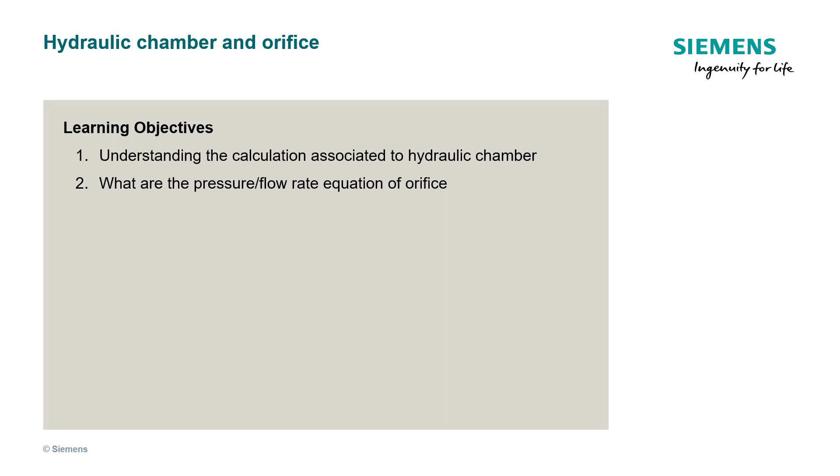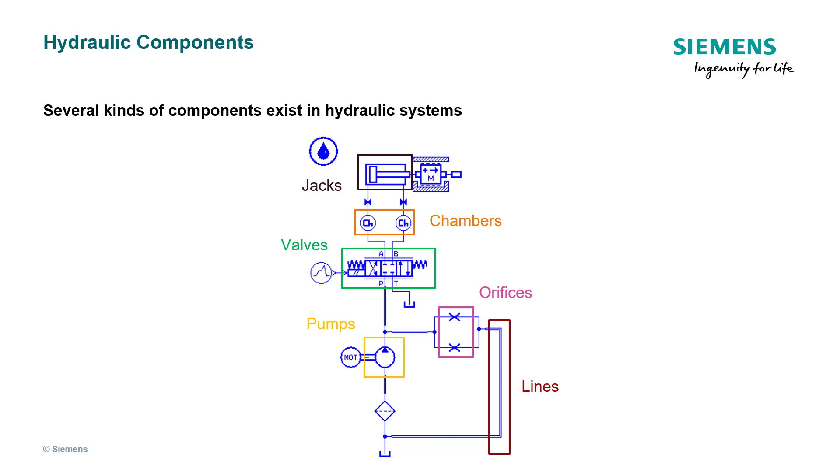Let's start with a typical hydraulic system where a pump acts on a hydraulic jack through a directional valve. This system regroups classical components found in hydraulic systems: pumps, lines, orifices, chambers, valves, and hydraulic jacks.

Hydraulic chambers are capacitive elements. They can be found in classical chambers, but also in accumulators or lines. The hydraulic chamber can have constant volume as well as variable volume. The inputs of the chamber are flow rates entering inside the volume, and the output is the pressure inside the volume.

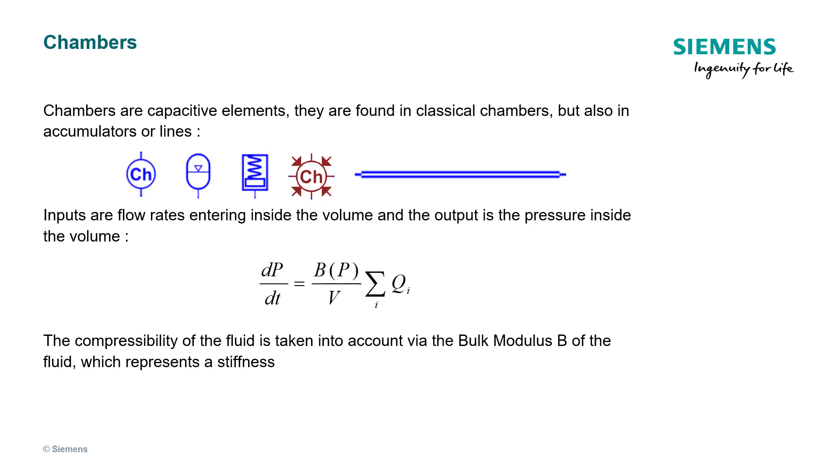The general equation behind a hydraulic chamber with fixed volume is shown below. B is the bulk modulus, which represents hydraulic stiffness. For a variable volume chamber, you can check the help document for equations.

There are two kinds of losses in hydraulic components. One is singular losses, or local losses, which happen at restrictions, orifices, expansion, or contraction due to disturbances. The other one is regular losses due to viscosity effect, and regular losses occur in pipes.

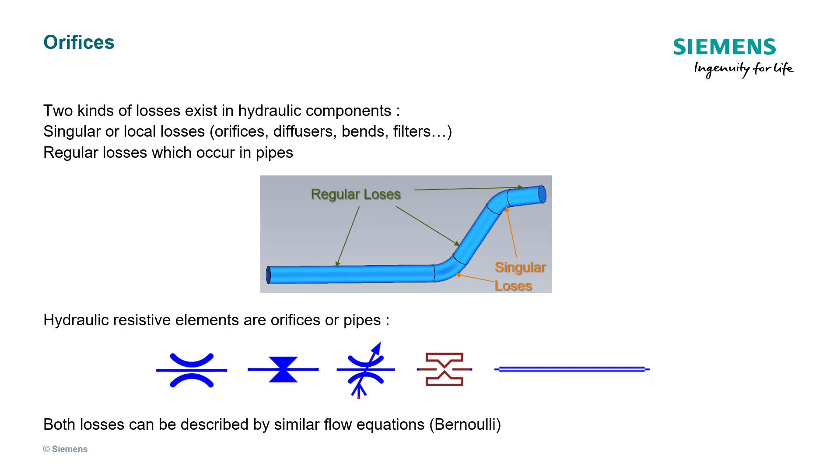Now we'll introduce how the equations of the orifice are derived. From Bernoulli's equation, under the assumption that there is no energy loss when fluid passes the orifice at the restriction in the middle, as shown in the figure, the total pressure will recover if the flow areas, heights, and static pressures are the same at both upstream and downstream positions.

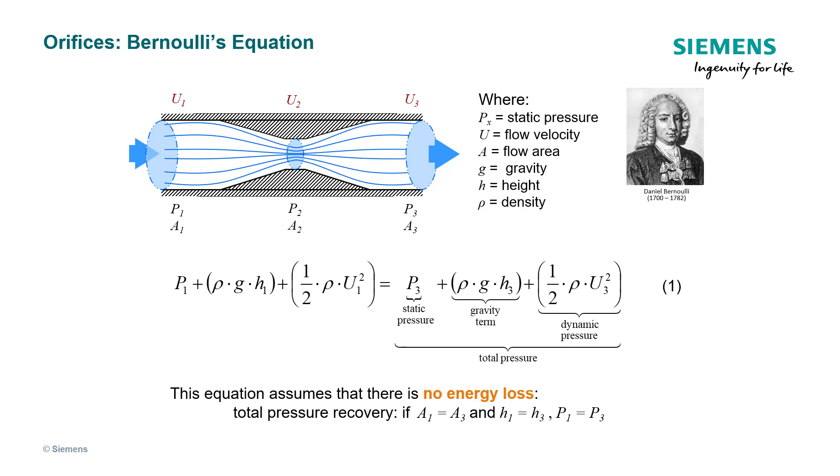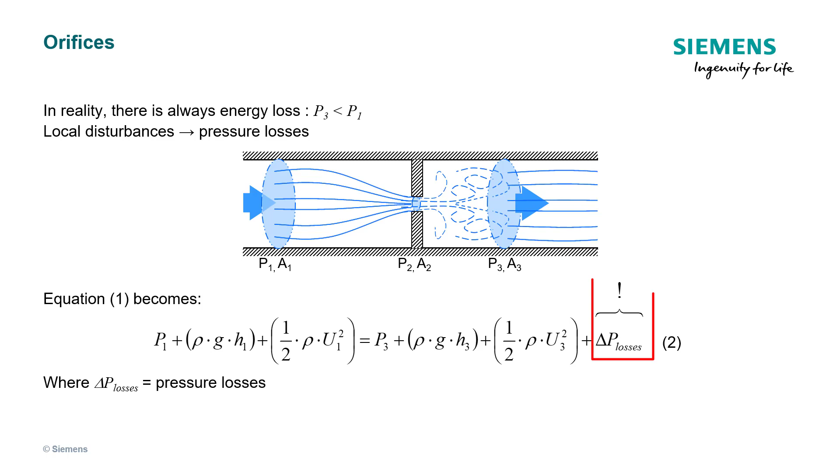But there will always be energy loss, and what one can observe is P3 is less than P1, because when fluid passes through the orifice, local disturbances happen, and it causes energy losses in this region. So Bernoulli's equation will need to add a pressure loss term on the right-hand side. As introduced in previous slides, there are two types of pressure losses.

For the regular losses in a hydraulic network, the pressure losses are expressed as a function of the fluid velocity u, density, and the friction factor xi, as shown in equation 3. This equation is mainly used in components from the HR library.

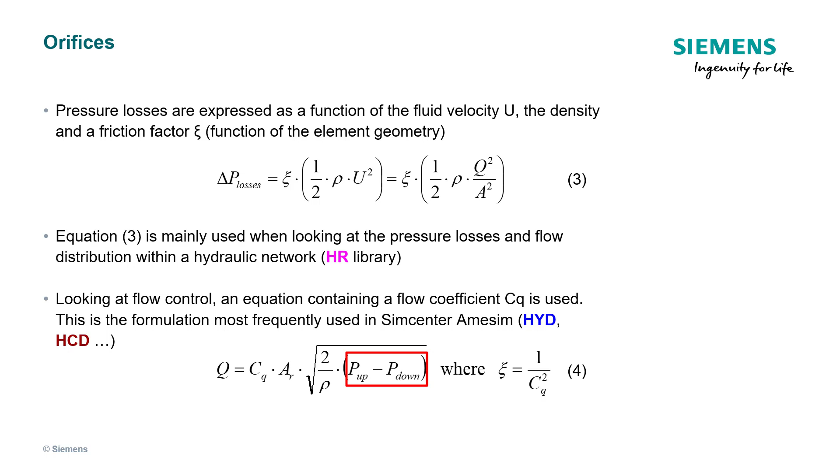In flow control components, another equation, shown at bottom, contains a flow coefficient CQ, and is the most frequently used equation in both the hydraulic library and the hydraulic component and design library. AR is the cross-sectional area of the orifice, ρ is density, and P up minus P down is delta P across the orifice. We're familiar with these terms, but what is CQ?

There are two types of flow regimes defined in fluid mechanics, depending on whether inertia or viscous effects dominate. It's a laminar flow when the flow pattern is smooth. In this situation, the viscous force inside the fluid is strong enough to limit the fluid particles to flowing only along one direction. When the fluid is turbulent, the fluid motion is random and has turbulences. Due to strong inertia force, the fluid cannot be constrained in one flowing direction anymore.

The two flow conditions are related to the Reynolds number, Re, which is dependent on flow mean velocity u, hydraulic diameter of the orifice, and viscosity, and the transition between these two regimes is done through the expression of the flow coefficient Cq.

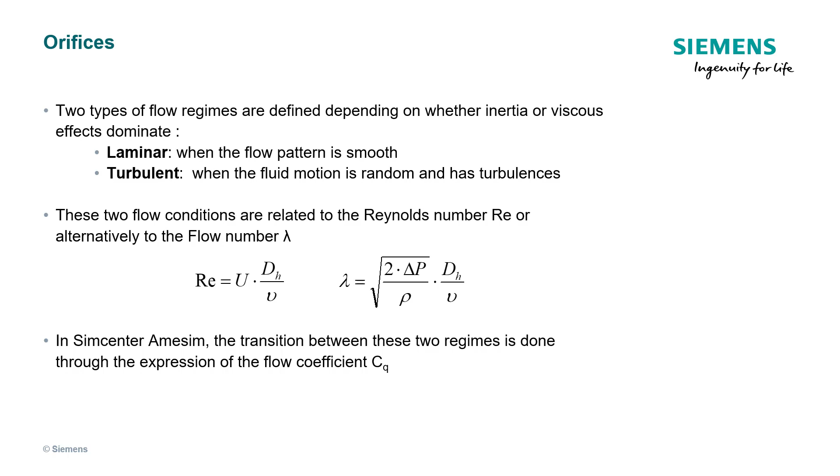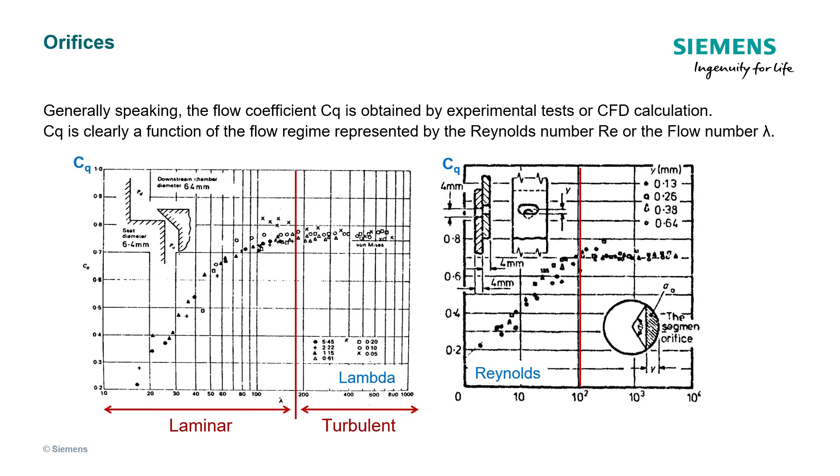The flow coefficient Cq is obtained by experimental tests or CFD calculation. As shown in the figure below, there is a critical Reynolds number. When it is lower than this critical value, the shape of Cq is almost linear and the flow regime is laminar. When it is higher than the critical value, Cq is at its maximum constant value and the flow regime is turbulent.

Now, as a summary of flow rate calculation in the orifice, we have the following equations. These are the most important equations for the orifice, especially the last one. Please do memorize these equations. They will be helpful when you are going to tune your own hydraulic system model.

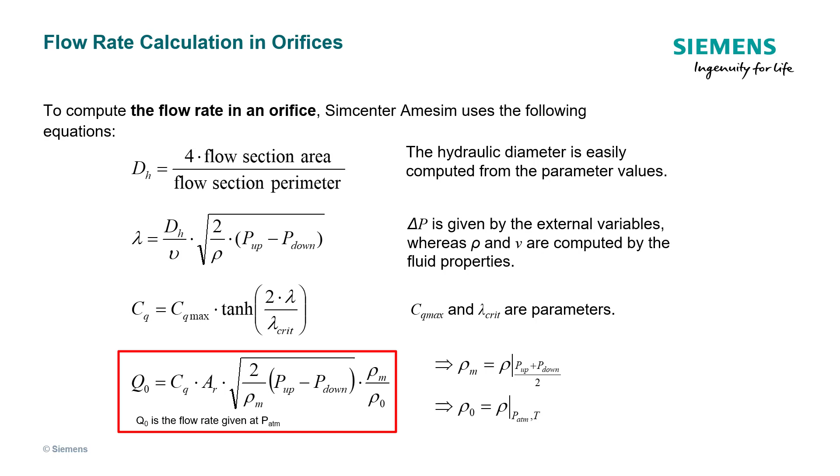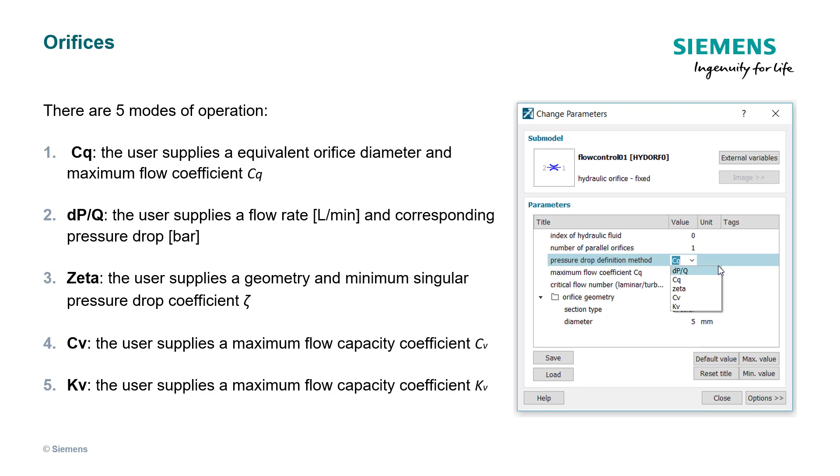Please also notice, except for the conventional use of CQ for pressure drop and flow rate calculation, there are also 4 other options in the orifice component. For a more detailed description of these methods, please refer to the help document.

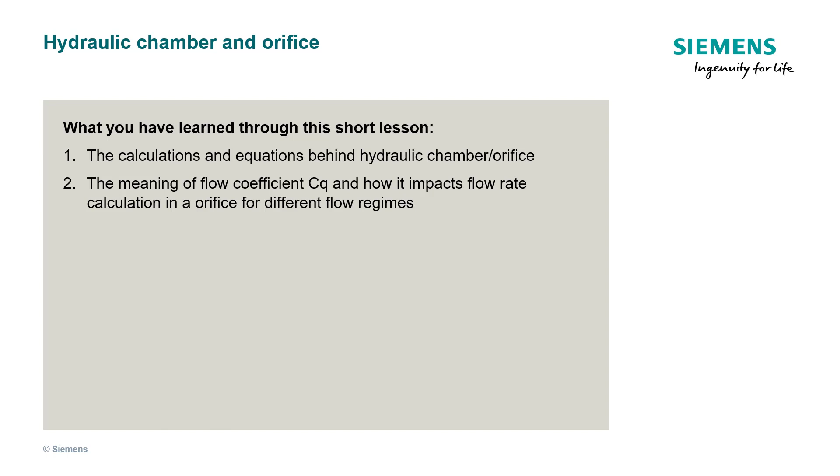In this lesson, you have learned the calculations behind a hydraulic chamber and an orifice. Moreover, you must know the meaning of the flow coefficient CQ, which can determine the flow regime, and the flow rate calculation in an orifice for different regimes. That's all for this short lesson, hydraulic chamber and orifice.